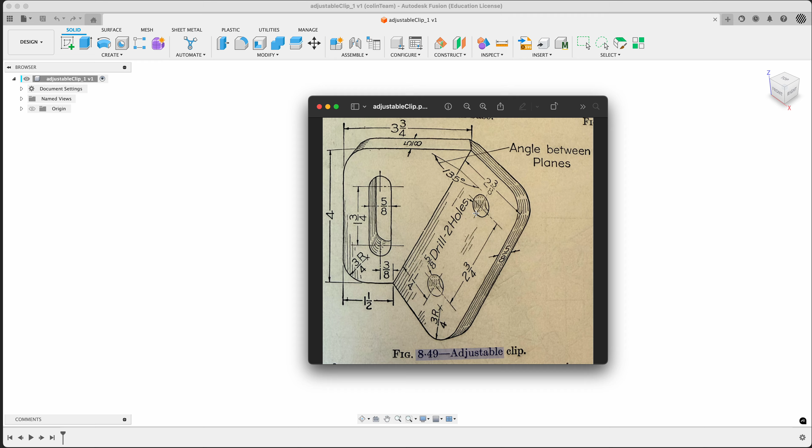So, there's our file. It's in the right spot. Who cares from now on? Now, let's have a look at this guy. There's probably going to be two driving sketches here. We could maybe do it in one. That might be later in the semester, but for now, let's go old school: 2 sketches with an angle in between. Now, the question is, do we do the sketches all at once, bend them later, or do them separate? Let's do them separate for this time. There's other ways to do this, but we'll stick with this more obvious way.

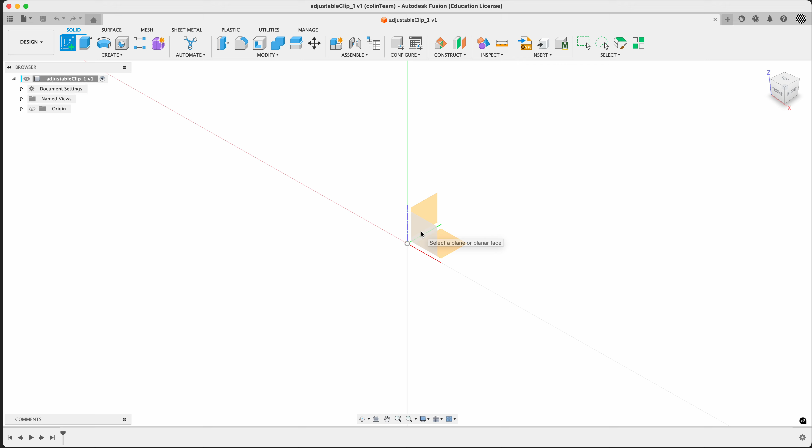Now, let's go with parallel to the front, put the first sketch on there. I have mine set so it doesn't rotate to look at it, but you can always pick look at. It's got a kind of rectangle here. I'm going to put the origin in the center of this, I think. Not that one side is clearly more important than the other. This one's more obvious and presented to us in the sketch as flat. So we'll do this one first, second.

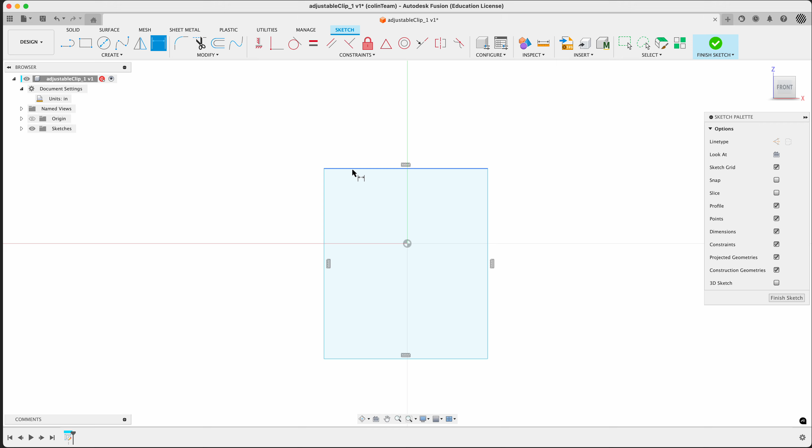Start with a rectangle. And we see here we've got millimeters going on. If we didn't see that, if you do this, that's millimeters. Escape out of that. First thing we have to do is change the units. Right now it's in millimeters. The sketch is supplied in inch. So let's go to inch. Now if we look at, for example, 4, let's do a dimension from edge to edge and type in 4, and depending on your defaults and settings, it should zoom the whole thing up to fit and center it in your screen.

Okay, not sure where it is yet. Let's keep on trucking. 3 3/4 across the top. Out here, there's nothing more of interest, so that's our max. 3 3/4. Now, in Fusion, you can just type it out: 3 space 3 divided by 4. It'll do the calculation for you, but if you look at it again, you still see what you typed in, 3 3/4, and then inch as a unit added for us. Nice.

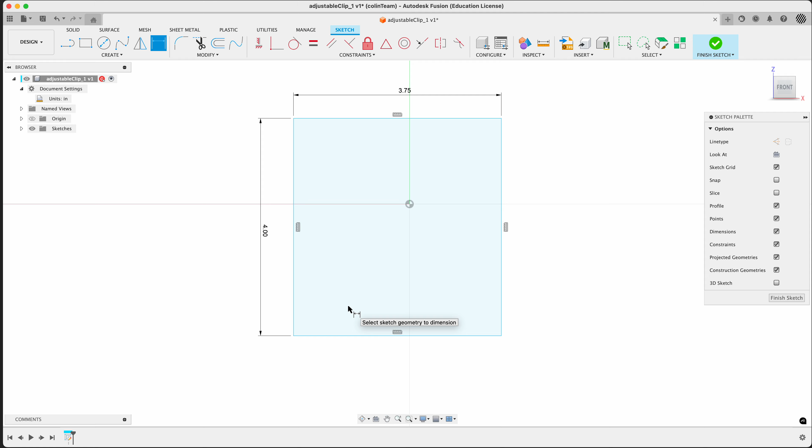1.5 from the corner at the bottom. We've got a line. Just going to stick it on to the vertex of the other side. Check again. 1.5. So we can go from the edge, but no, we might cut that off. So 1 and 1/2. Oh, not a fifth.

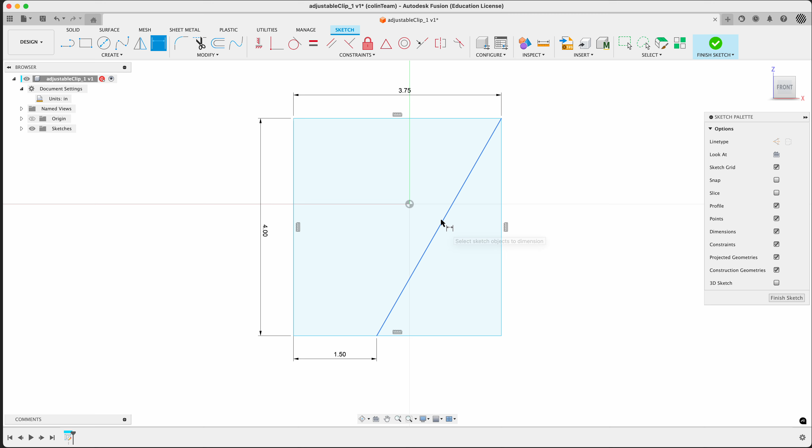Makes sense to put the origin in the middle of this line here. We can use one constraint for that midpoint. Either or, you can pick it in any order you wish. We'll snap it there. Now this is a little strange move we're about to do here.

Out here there's nothing in the back for this shape. We don't care about anything further out here. We've got 2 profiles. I don't want 2 profiles. I would like to keep everything under control nicely. However, I don't want to lose geometry that I've tried to make here or sketched out.

One thing we can do is kind of manage our profiles by making one of these edges construction. Doesn't change anything, our geometry is still intact, everything's good, but we now have only one profile to run with. I know what's coming. We're going to be using some surfacing and we're going to be picking this profile.

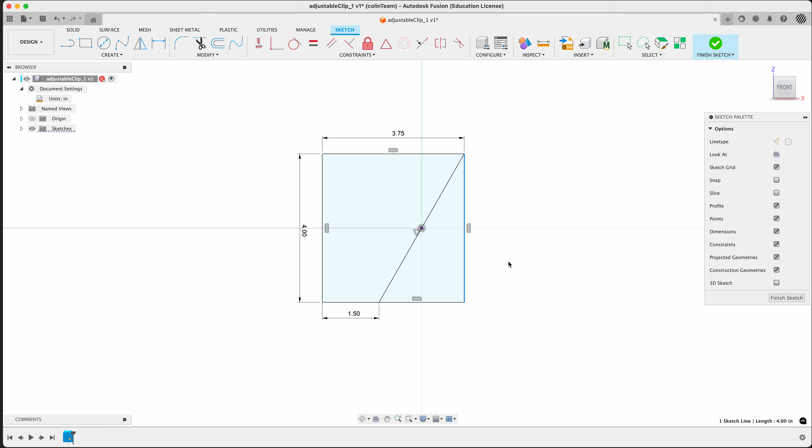If we keep this profile managed properly, we can actually get some efficiencies out of Fusion in a sort of very kind of fancy way without really making a big deal about it. So let's do this way. So I've just made this back edge construction. It's still there. If we want that profile back, just switch it back. But for now, doing things well.

Oh, sorry, hold on. I'm not using my cursor. Nor my, what's it called? Suddenly forgot the name of this guy. You're going to be able to see the inside of my computer here. Sorry about that. Let's see if that works now. There we go. So, sorry, not using the right stuff.

Now we've got our stuff running properly and everything's looking good here. So that's fine. That's enough for the sketch. Let's have a look at what we want to see here. 135 degrees across the sort of maximum angle here. Again, let's stick to old school CAD. Let's just make a plane for us to sketch on.

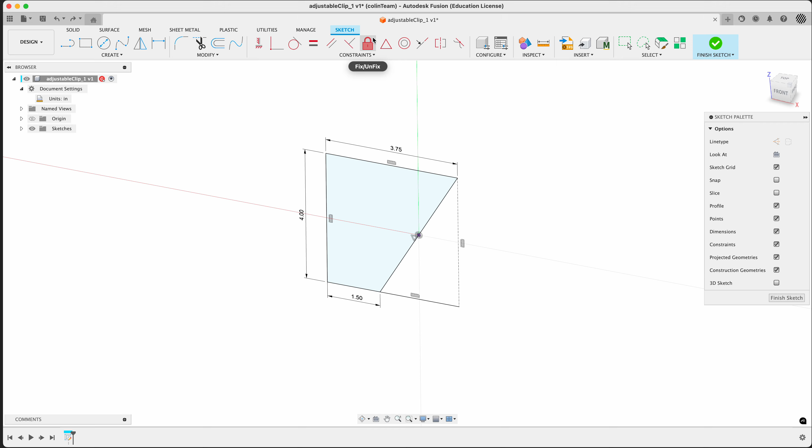Now, tidiness of modeling in the history down here, I'm going to be inevitably stuck with a construction here, right? Because I do want to make a plane. So if we look up here, if we finish our sketch, we want to do that angle. There's construction. Plane at angle, of course. Now, if we pick a line in the sketch we just finished, it's going to assume that we're bending the plane of that sketch, this guy, around. Pick an edge.

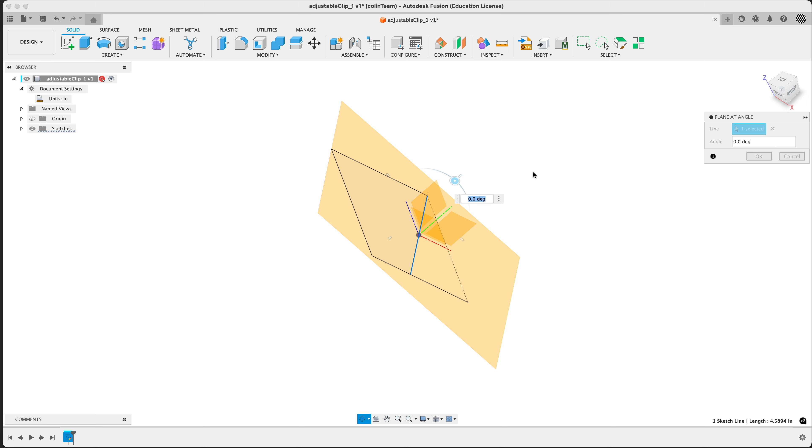You can see it starts off at 0. Let's just try typing in 135. You can see it does what we want, right? It's on the right side because of some things that we picked in the beginning. We're on the front, we're sketching on the front and all that stuff. It tends to put it in the right spot for us, in the way that most things are modeled.

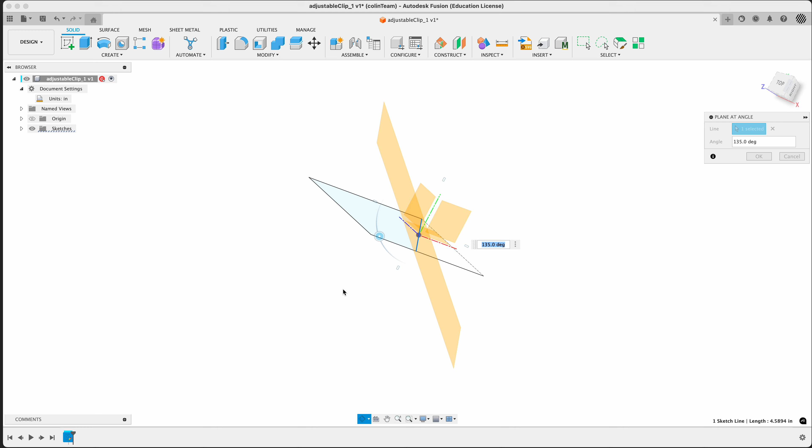If you want, you can do a little test here. You can drag it around. But what we're after is 135. It'll snap to 135, which is 90 plus 45, of course. Once you're happy with that, say okay. You'll notice you get something in history for that. It's fine. And we want to keep a track on our sketches.

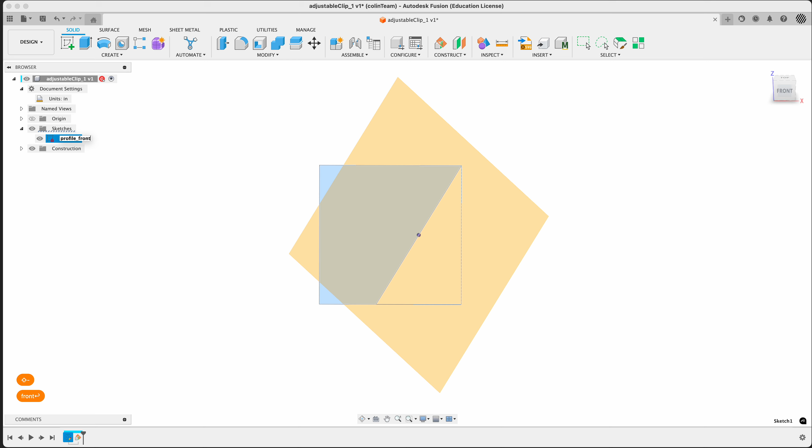While I'm here, before I start, because I'm going to do another sketch, I want to name this sketch. I'll slow double click. Usually for me, profile, and I'll call this front. We're about to add another sketch to this plane we just did. I'm going to call that something else. So right click on our new plane, create sketch. Anytime we can rename this. I'm going to call this profile. Inclined, it's probably a good word. Sketch is run, it's fine.

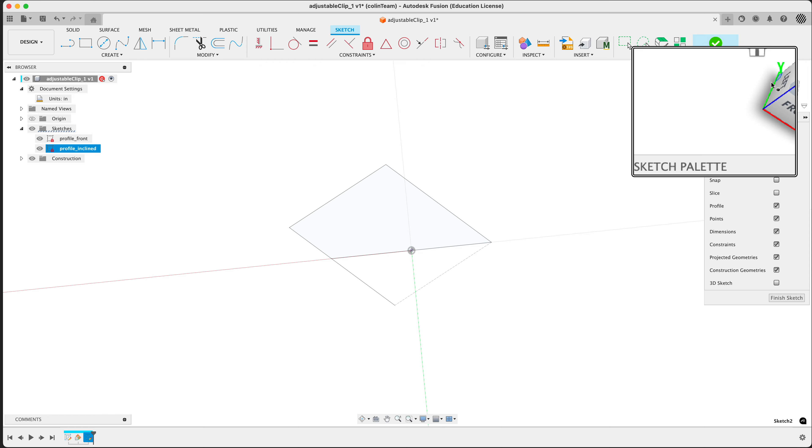Now, unlike SOLIDWORKS, Fusion is made by Autodesk, and they have this attitude of trying to keep things a little bit more overt. Notice that the origin has shifted here. We have this edge, if you look up here. See that Y is green? Y is green here, but it's shifted.

It's now perpendicular to this new red, which is X. So we've got this X, Y, and it's rotated around to match our plane because we used this line to make the plane, which is holding the sketch, if that makes sense. This is a little disconcerting to me, always has been. It can kind of reverse if you go to a certain amount of angle. So if you go back in later and shift the plane, we're going to be completely sure that it's good.

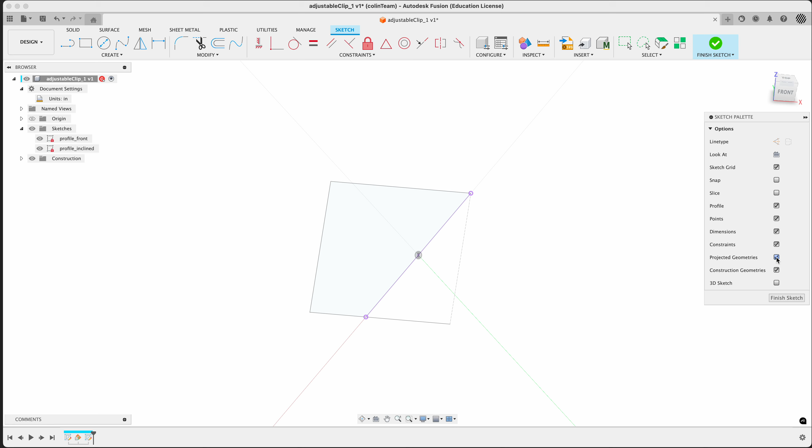Well, maybe not, maybe yes. Let's be careful. I'm going to project this line because it's going to get reused. There it is. You can turn these off and on. Good thing is we can use it for construction or for geometry.

I'm going to draw 4 edges here which are in no way connected or perpendicular or anything. All right, so I'm going to avoid perpendicularity, parallelness, all that sort of stuff. I'm just going to connect them. I'm going to use constraints to get what I really want. So perpendicular down here, perpendicular over here.

Now, still not completely controlled. So I want to create a nice chain of constraints. I'm going to not go perpendicular, perpendicular, perpendicular, go to one of these guys. It doesn't matter which one. Now we know that these are parallel.

Another way to do that is actually say, let's make these parallel. This references back all the way to the original projected line. This is safer, you could argue, because then if the line does move, this will all move with it. Perfect.

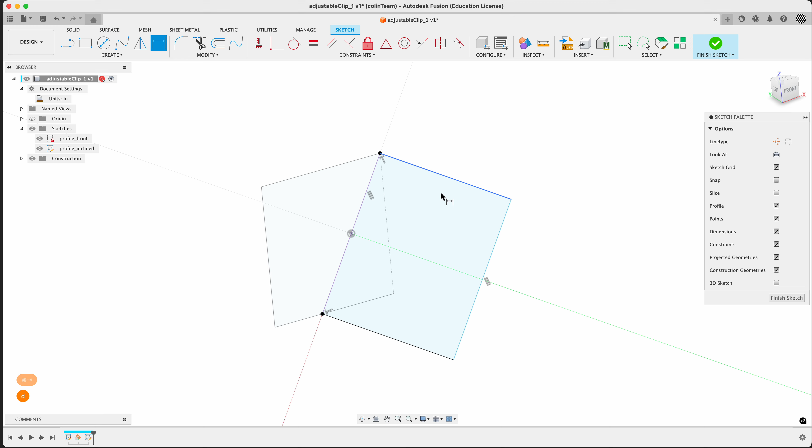This part is 2 3/8 from the projected out to the edge, 2 3/8. So right, 2 3/8, 3 3/4. Everything looks good. Again, as usual with Colin, we're going to do iterative things, so not worrying about the holes yet or these fillets out here. Just trying to set it up so it's right.

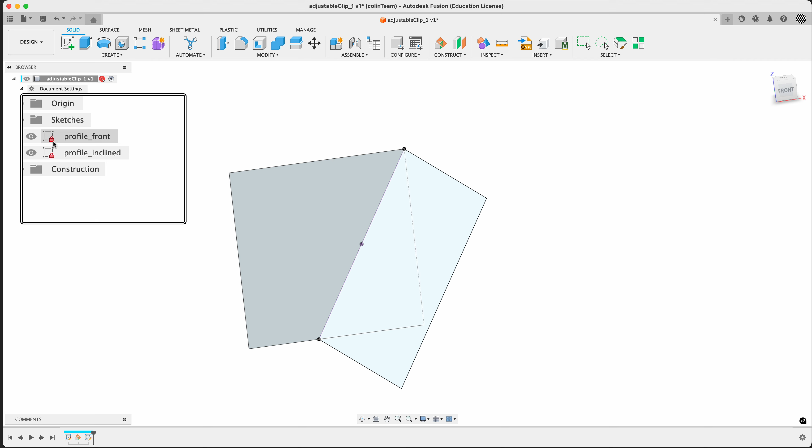Finish the sketch. Notice they're both fully defined, simple sketches. And we've set up our geometry correctly. Now, let's try a thicken. Sometimes we don't know where it is, so S for shortcut, thicken. Start typing it. There we go.

Can we pick? Oh, it won't let us pick something. What it's asking for is faces. We don't have faces yet. Right, we just have sketches. So it needs a face. It needs a surface body. So you might have noticed before up here in the toolbar, there are the, what do we call this in Windows? The ribbon, I suppose.

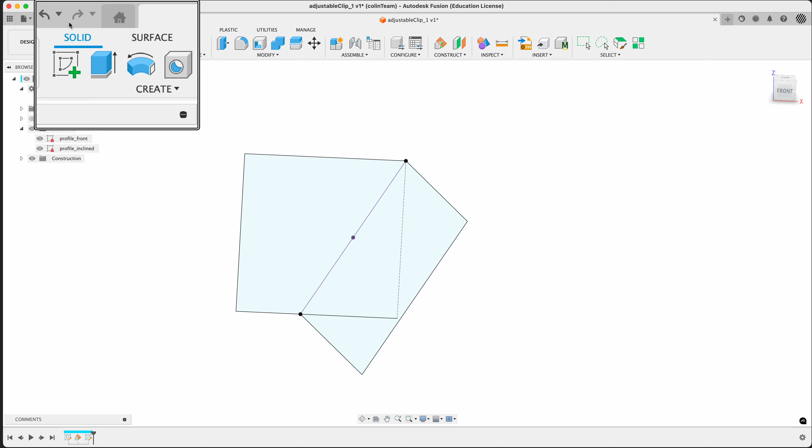We've got solid, which we've been working inside of, surface, ooh, mesh, sheet metal, plastic, utilities. This is all kind of hidden in the interface in Fusion. And if you click these, you'll see, oh, there is a lot of stuff hidden in here. Go to surface. Hover over them for a second, it'll show you patch, boundaries into surfaces, extrude a surface.

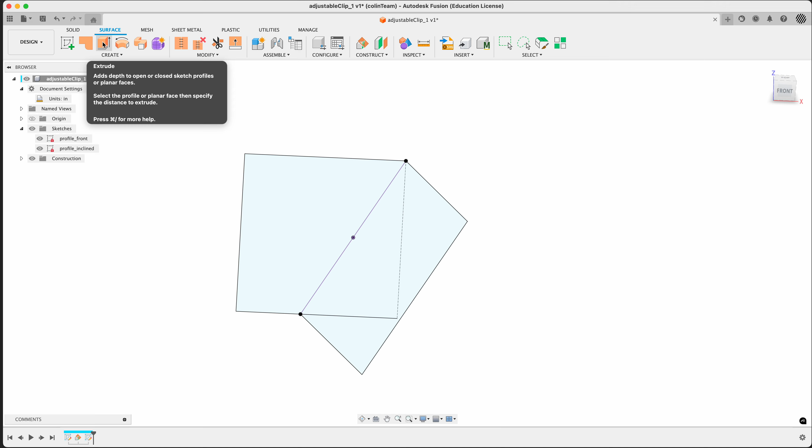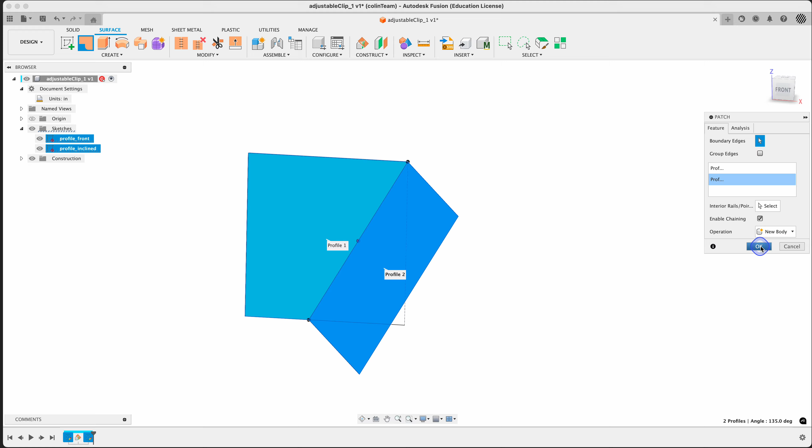This one's interesting. Trying surface to make a single surface body or solid body. Keep in mind we've got this here, so we're going to do this in steps. Patches first. Can we pick 2? Well, all it's asking for is boundary edges. Now we can make a 3D sketch for those who are into that sort of stuff, but basically we can try this. Why don't we try 2? What does it make for us? Inside of bodies? It makes 2.

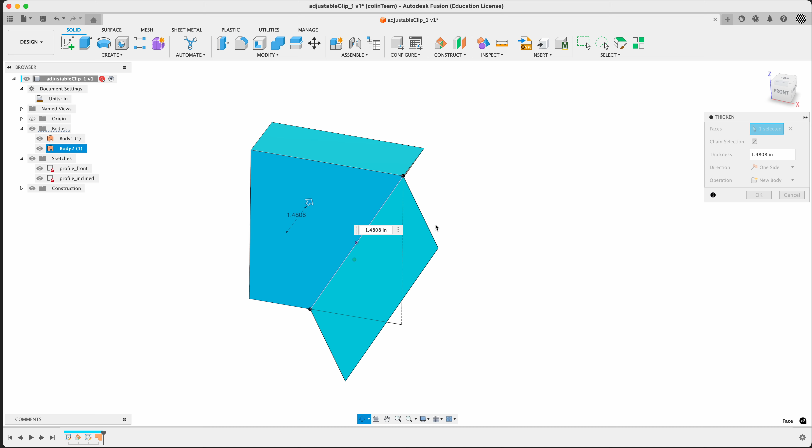So they are separated. So if we try a thicken here, let's go back to solid, and it's under, I think, create. Thicken. Right, it doesn't pick them both. I'm trying to select them one after the other. All it does is make this; you want to use this face to control the depth of this guy. This is all very complicated the way it works. You have to be quite methodical. That's what it's doing. But this is not what we want.

Go back to surface. We have to stitch these 2 bodies together. So bodies, in surface bodies, tend to have to be stitched. If you have a grouping of them that would define a volume, it will make a volume. For us, we just have 2. Pick them either in the screen or in the browser.

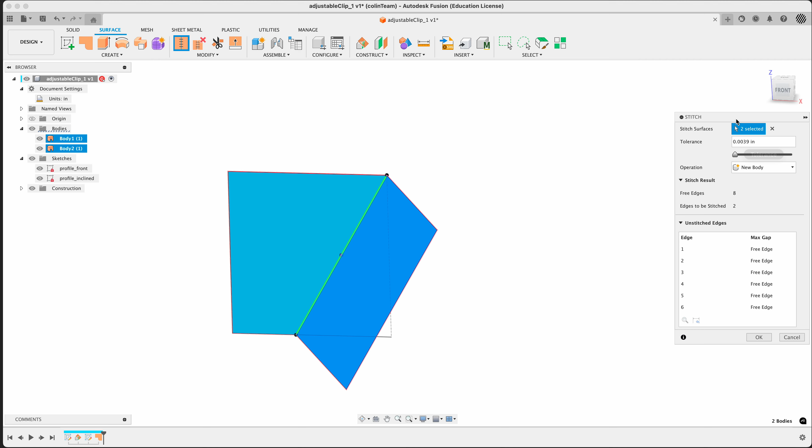If everything's good, it'll show you a green line, meaning that they're tidy enough, close enough, that they can be stitched easily. We just did this. You can change this tolerance. This is for later stuff. But for now, everything looks kosher because we just made it kosher. Say OK. It'll think for a second. It's actually doing a bunch of checks. And all of a sudden you go from two bodies to one.

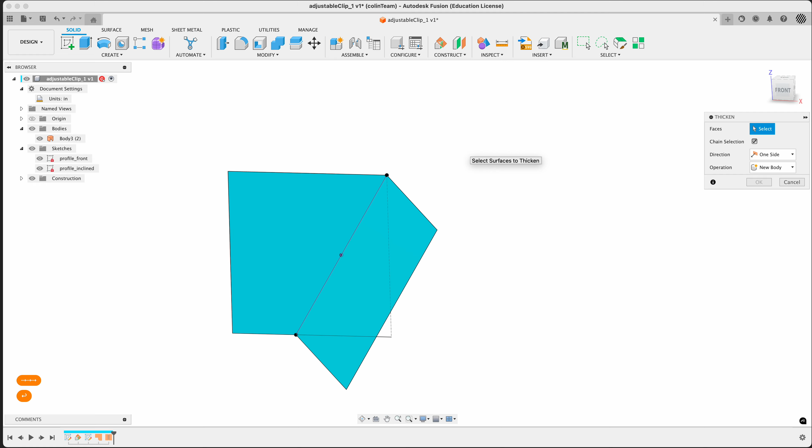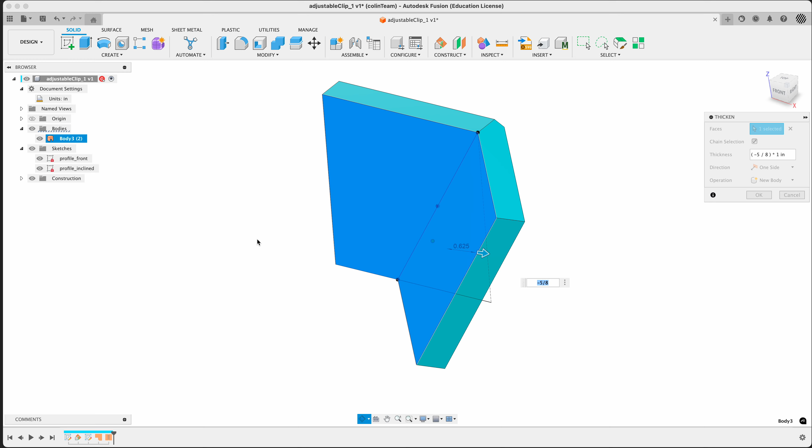Try to thicken again, if I can actually type correctly. There it is. Now we can pick this one body. Oh, nice. How long is it? 5/8. If I just type in 5/8, that's not the right way. So that's the positive. What I want is a negative, because I want it to go back into the body, into the volume here, the same as our reference sketch. So we've been sketching on these surfaces; make sure the thicken goes the right way. It's good.

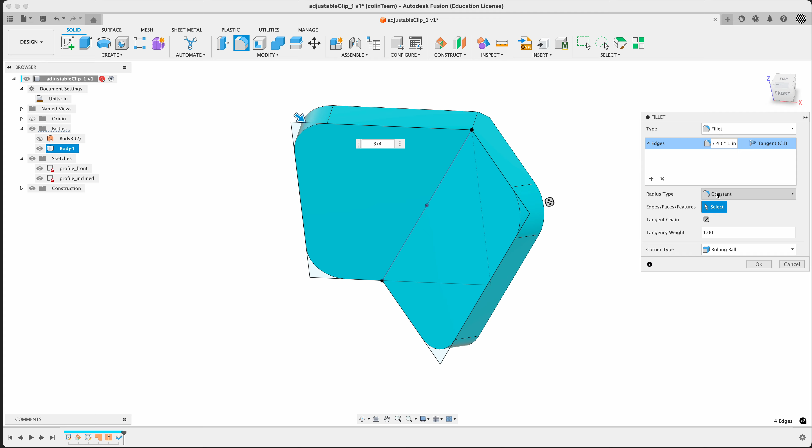Now, again, we're doing old school here. Next big thing are the holes in the fillets. Let's do the fillets first. F for fillet. Pick those corners. You can pick through if you know where you're going. And we're at, what are these guys? 3/4. 3 divided by 4. Easy. Just go with rolling ball, tangent weight, standard, constant, radius type, all that stuff. Say okay. We're kind of burning through the history here, but we've got some good stuff.

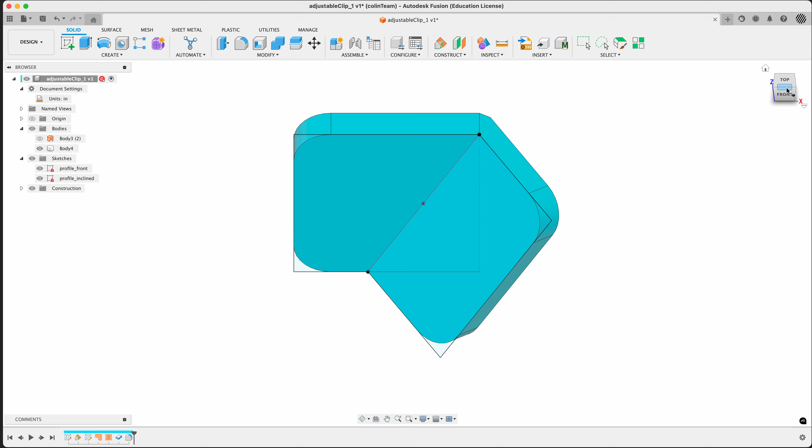Right? It's not bad. So we've done some work: sketch, plane, sketch, surface, stitch, thicken, fillet. It's not too bad. So we're doing okay. Notice this face here. Is it close to our sample? So let's try and get close to our sample. Let's go to the top. Just click the view cube itself between top and front. Have a look. They show this.

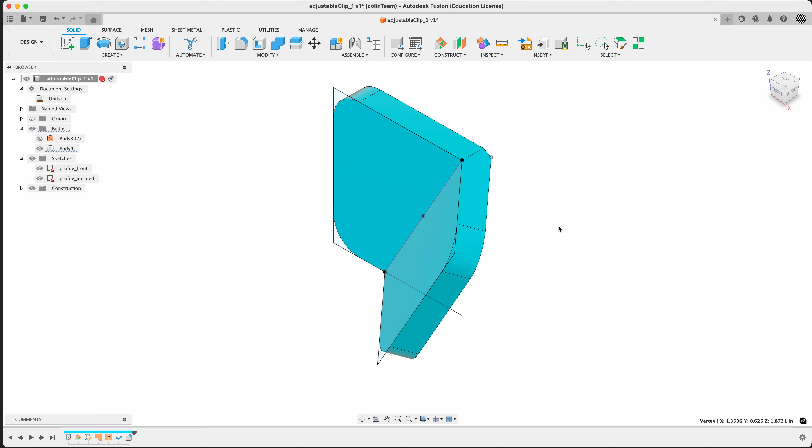Right, so we have a flatness here, edge kind of pointing, well, it looks like perpendicular to this face, and a corner kind of fairly vague in there, but there is a corner. There's our corner. So the thicken does give us a good standard result. It's quite nice. All in one pass. No trimming required or any fiddling around. Perfect for this part, for this model. It's good for us. Now, next is these holes.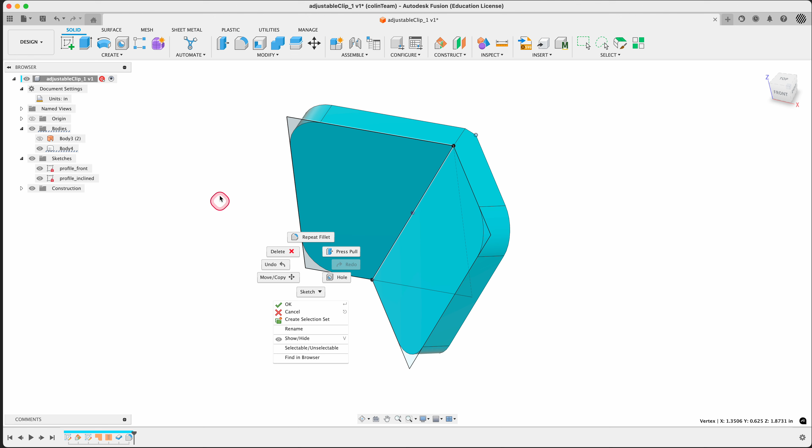Again, the temptation is to draw another sketch on the planes and all that stuff. Why would we do that? That's insane. So let's reuse our sketches, because Colin says so, and we'll draw this 5/8 slot. If you can see the sketch, you can see it gets highlighted here. Let's just right click on that guy. And can we get anything here? Right, so there's a bit of a problem because the profiles are all going through and all the rest. So it's easier to pick in here in the browser, edit sketch.

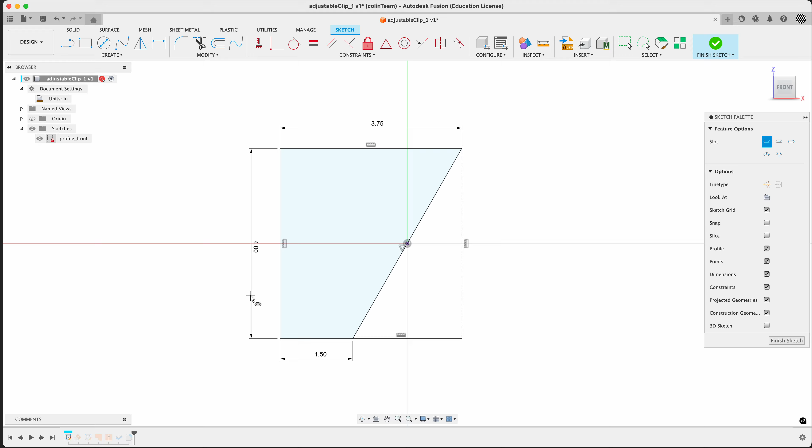Have a look at it. What do we have to sketch here? It's a slot. Now, of course, S for search or shortcut, add slot. There's a bunch of slots. Excuse me. We have a center to center. They're giving us these dimensions, so use that one. First is our center line. Snap that vertical. Or if you want, you can go crazy and live on the edge and just make it like so. So get the geometry right first.

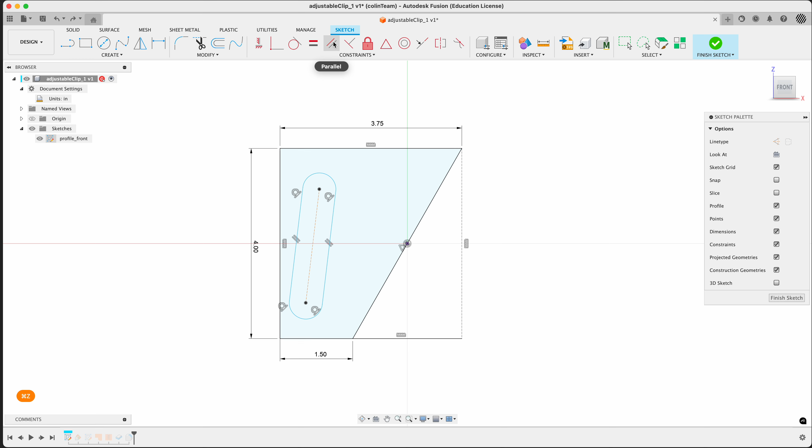I'm going to force this to be vertical. Another way, and again, the argument is parallel. It's up to you. So I'm going with parallel. See how they dimension 5/8 across these flats. Let's do that. But where is it? No, we have to position this slot, and they don't give us anything about where it is from the top and bottom. We have to assume it's centered.

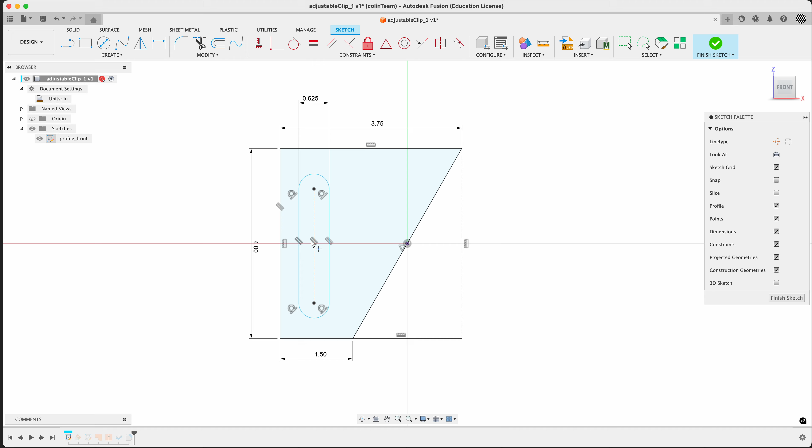So let's do that. Now, easy way to do that is to actually put a point in the center. It'll be kind of where that, see this guy, there it is. That's what you're after. It'll be close to that constraint. Now, we don't have any lines to attach. However, we could just say, we can go horizontal, which is fine, to the origin. But dangerous, again, what if we move something?

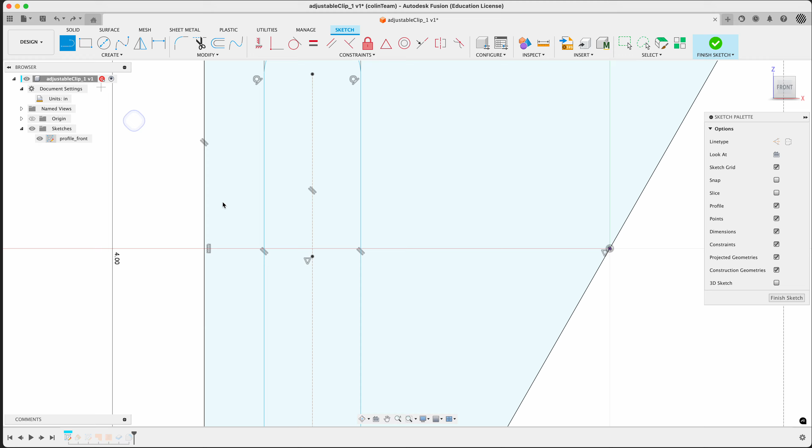So to be safe, ultra safe, as always, draw another line, make it construction, and make it parallel to something. I'm making a point here, so let's go to the top edge. If I can actually select my lines. Nice. Next, the length of that, 1 3/4, D, dimension, 1 3/4. And it's 3/8 from the corner, so 3/8.

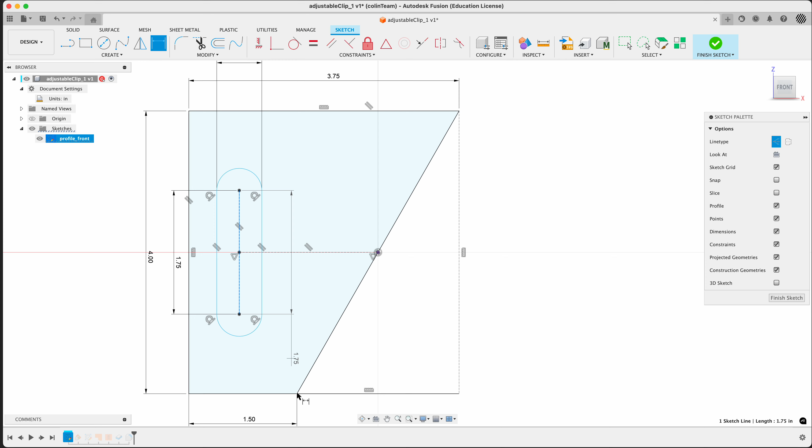Now, this is a fairly strange dimension. Oh, getting some strange now. 3/8. Now, that's a hard thing to measure to. One thing you can do is toggle this to driven, which allows it to be moved around again.

I'm getting some serious lag here again. I'm going to stop my cursor, see if that does it. I have a suspicion about that cursor. Maybe it's not that guy. I'm stopping my screencaster.

Something's going on. That's right. Anyway, undo back to where we were. One thing you can do is make it driven and then actually find what the dimension is to the other side. So dimension to the outside edge, which might be more useful. Better known as, what is that, 1 1/8. Perfect. Leave that there. Everybody's happy.

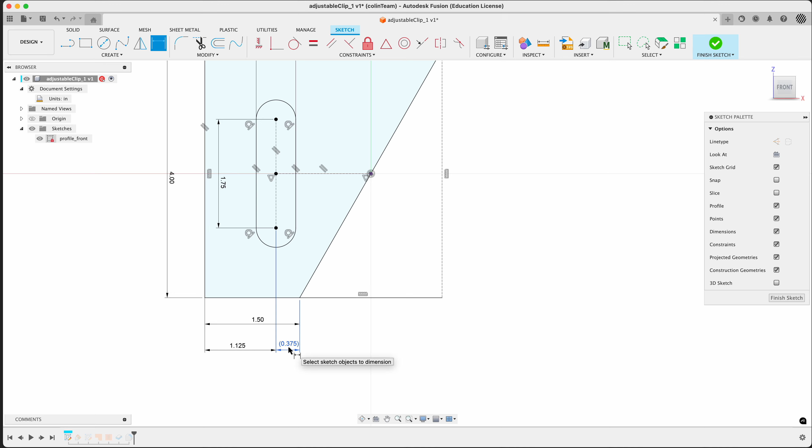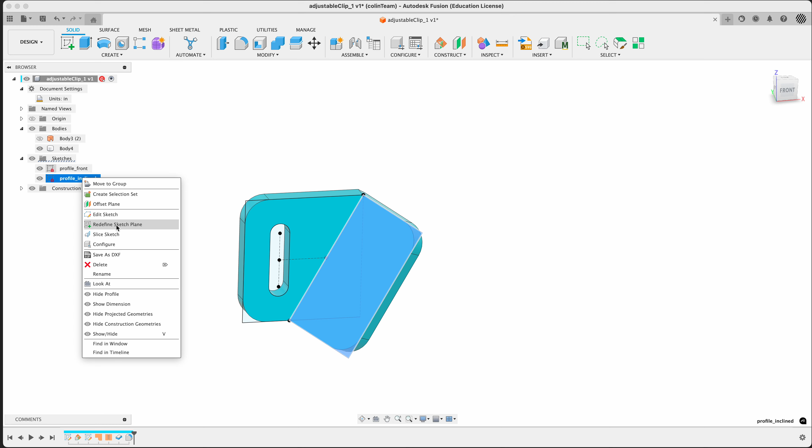Finish the sketch. Nothing happens, unfortunately. However, if we surface patch, you notice it picks it up now. Just leave it and say okay. All you have to say is okay. Nice. Great. Perfect. Let's do the same to the next sketch. Same sort of approach. It's kind of like the same slot, but 2 holes instead.

Let's edit the sketch. I'm going to start off with 2 circles. Just press circles, join them with a line. Now I'm going to pre-toggle. If I press X before I do anything, you'll notice it toggles construction on and off. Draw a line. Connect the 2 centers. Escape, sorry. And go for parallel to the outside edge. 2 3/4. And we want it to be centered again because they don't tell us where they are.

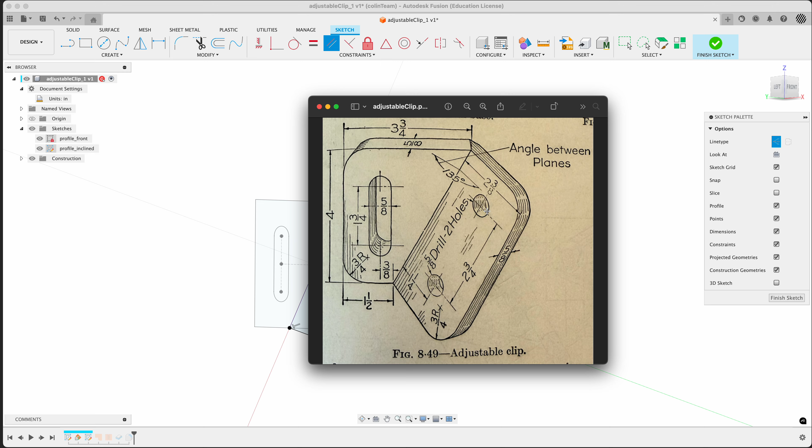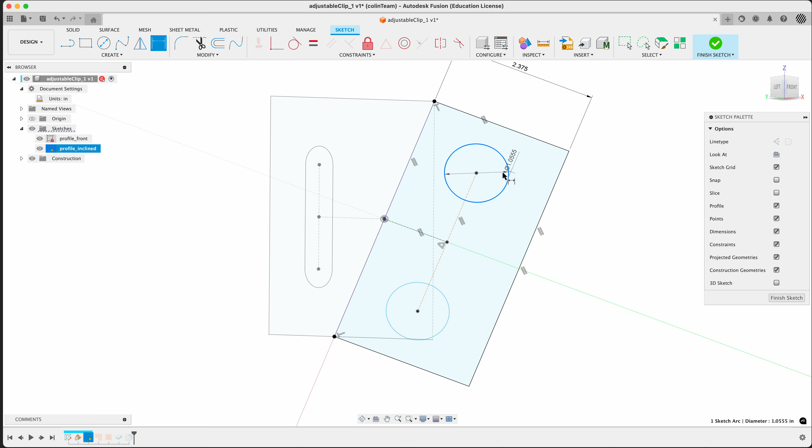So let's go through the stuff. Same approach, we get to do it again. Move into the center, stick it on there. Draw another line from that center to our origin. Make it parallel to, again, just use the top edge again. We can now dimension things, like for example, oh, hold on, we've already had this 5/8. I'm gonna escape out of that. I'd like to reuse that number.

So what I can do is show dimensions on the first sketch, right? So I can see them while I'm working. Do dimension again for this guy, and just simply pick that dimension that's controlling the size of the width of the slot, D10 in this case. Make these equal. We get 2 holes driven by this number right up here. It's perfect. Right, so you can adjust these while you're here.

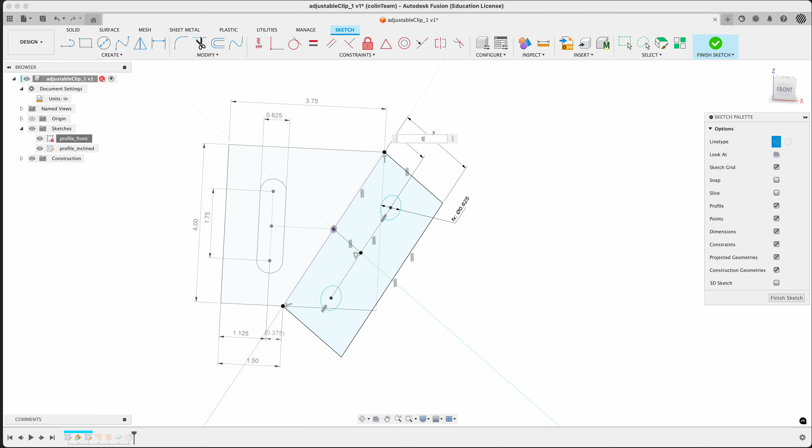What's missing here? Oh, where is it? 1 1/4 from the inside edge. Dimension. It's kind of in the way over there, 1 1/4. Now, things still aren't completely defined here. What's missing? The 2 3/4. We also have to dimension the length of the line. We get tired of typing the space and we know what the value is, 2 3/4. We can also just type it in.

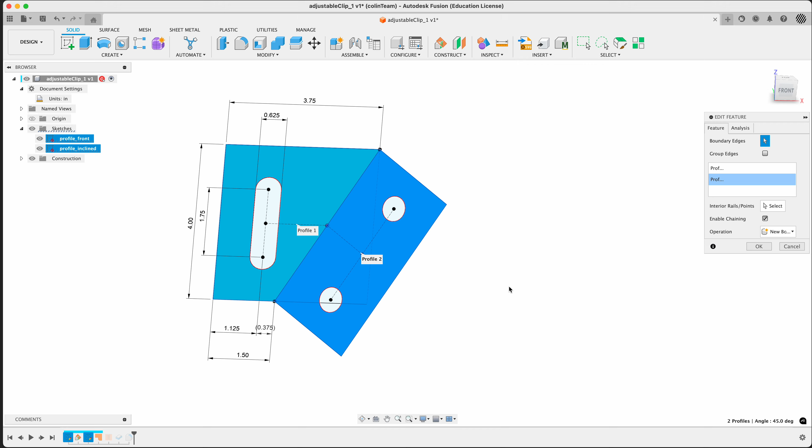Finish the sketch. Missing the hole. Just simply toggle this guy by running it again and say okay. Perfect. We're kind of done as far as they're concerned. You can hide the sketch if you don't like seeing these dimensions all the time, or you can show them all, we can just hide the sketches. Perfect. Again, if you're not seeing color, Shift N. Sorry, my caster's turned off because I think it's making my computer chug.

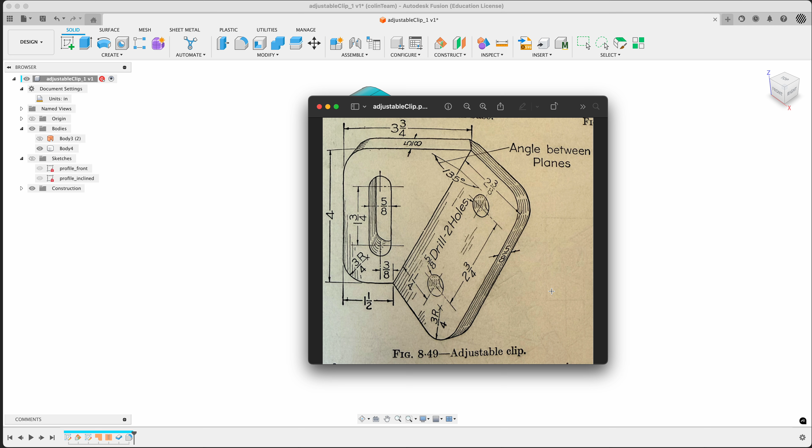So we've got a good looking thing here, except for one problem. In this part, we've now replicated it nicely. This edge, we know if this thing goes into fatigue, this is bad news, right? This is a corner. Hello, fatigue failure. So we should put a fillet to this. Again, the temptation is click it once and press fillet, do a whole new feature. We shouldn't do that because we have this fillet here.

Hanging out at the end of our history, add a selection, give it like an 1/8. Right, there's lots of room here. We're not quite sure what has to be fastened on here. Go for an 1/8. All we're doing is adding more to the feature, so you can have lots of rows here. So I tend to see fillets at the end of the history. Perfect. And that's not bad.

So this is the end of our first video, just getting it set up, getting it modeled. From here on, we're going to have another video on how to attach some assembly parts, some fasteners. We'll put some 5/8 inch fasteners on those two holes and explore how to do that. There's two main methods for fasteners in Fusion these days. And we'll also talk a little bit about mesh. So that's the end of video 1, how to model our adjustable clip.